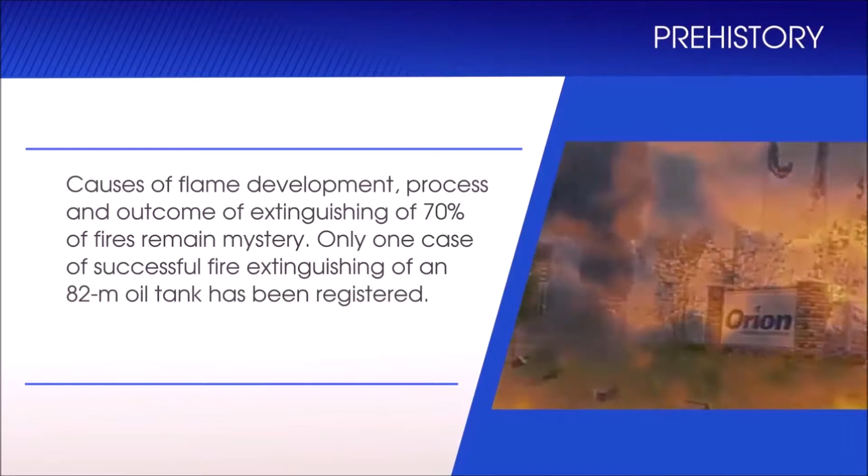The causes of flame development, the process, and the outcome of extinguishing 70% of fires remain a mystery.

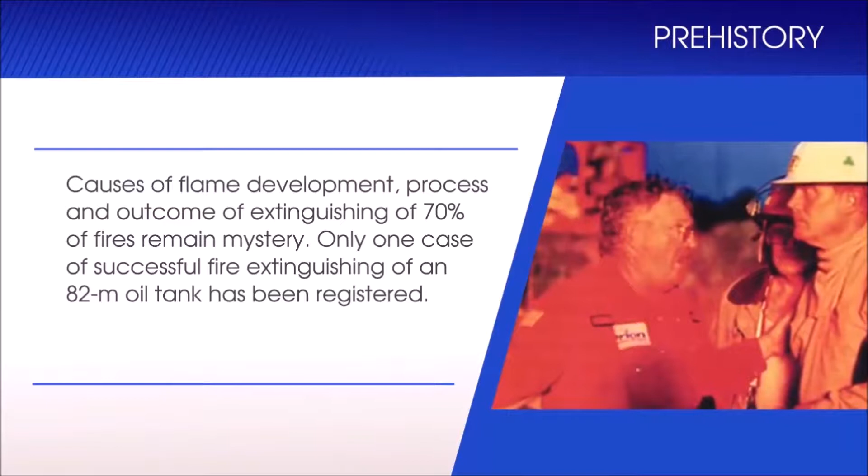Only one case of successful fire extinguishing of an 82-meter oil tank has been registered. The tank was extinguished in the United States at the Orion Oil Storage Facility using non-standard, extra-powerful equipment that had been delivered from another region specially for this purpose.

Not a single case of an oil tank fire extinguished successfully with the help of fixed or semi-fixed firefighting equipment has been registered anywhere in the world so far.

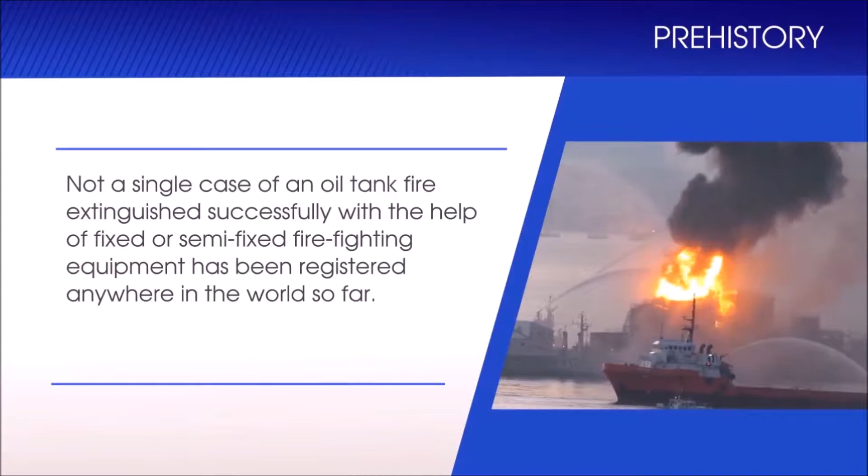These incidents show that in any country in the world, regardless of economic strength, fixed fire extinguishing systems installed on storage tanks in hydrocarbon processing facilities and factories cannot provide the solutions they were built for: first response to a fire and extinguishing it in its initial stages.

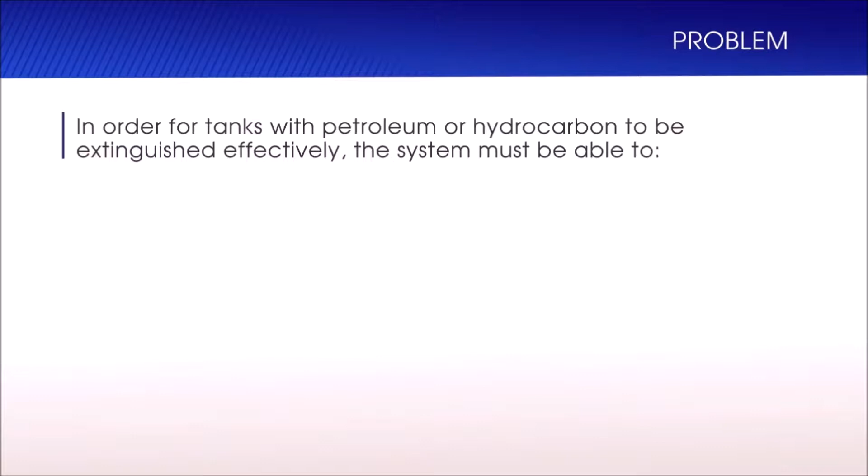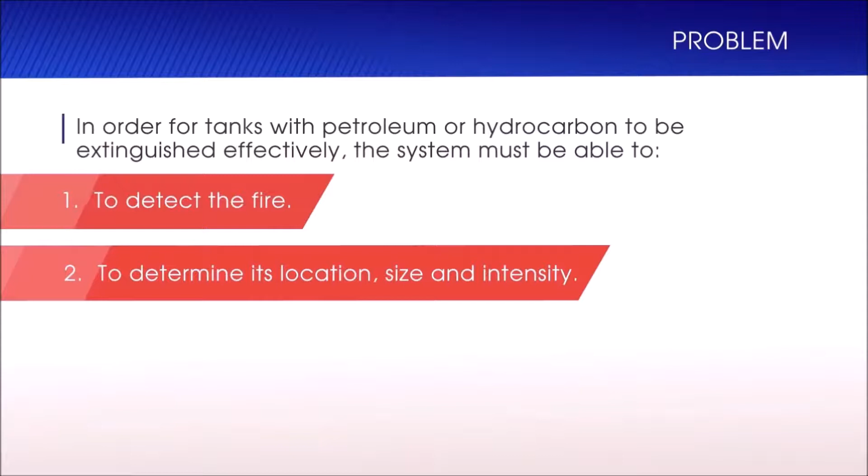In order for tanks with petroleum or hydrocarbons to be extinguished effectively, the system must: 1. Detect the fire. 2. Determine its location, size, and intensity. 3. Turn itself on and deliver the foam directly to the source of the fire.

4. Completely extinguish the fire. 5. Determine and confirm that the burning has stopped. 6. Disconnect extinguishing systems that are not in use.

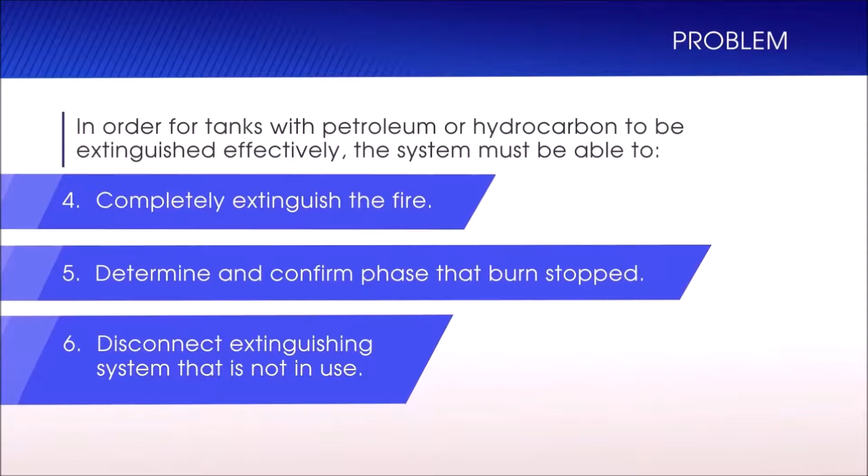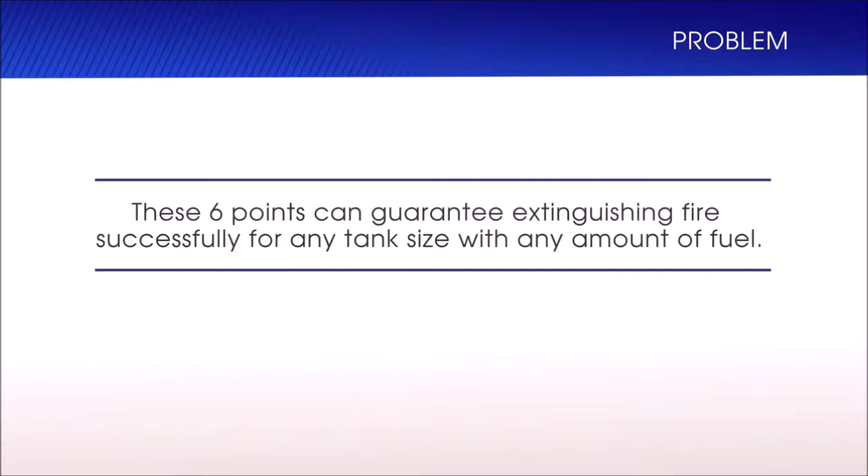These 6 points are guaranteed to successfully extinguish any fire for any tank size with any amount of fuel. The main challenge is the time from the moment of ignition until step 6, which must not exceed 3 minutes.

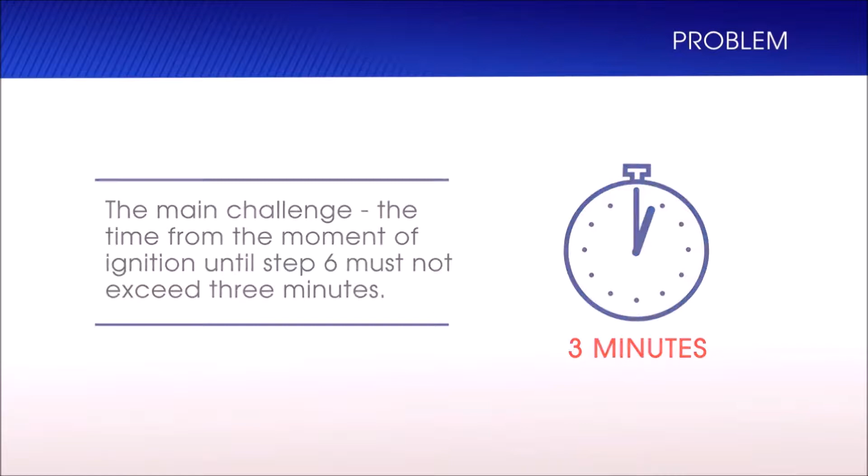Currently, available systems cannot reach the 4th stage in less than 12 hours. We present the Impulse Storm IS fixed firefighting system, which can reach all 6 stages and completely extinguish any fire in less than 60 seconds.

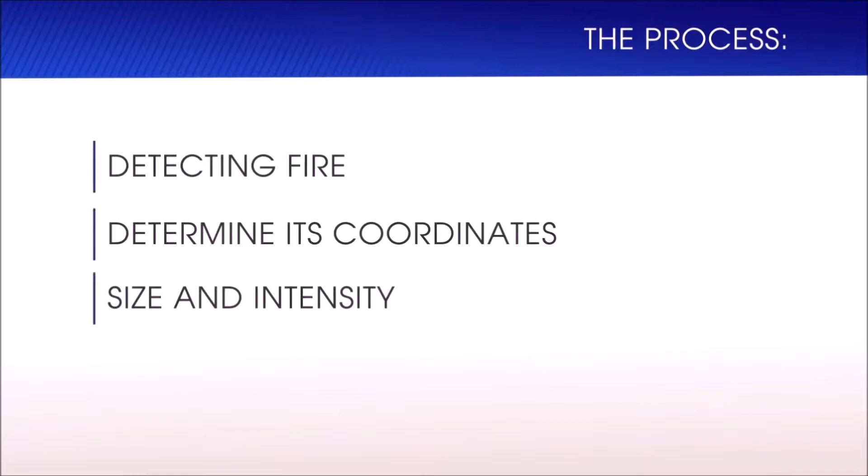The process: detecting the fire, determining its coordinates, size, and intensity. Example: a cluster of oil tanks of varying sizes. Monitoring the facility from a single point is impossible.

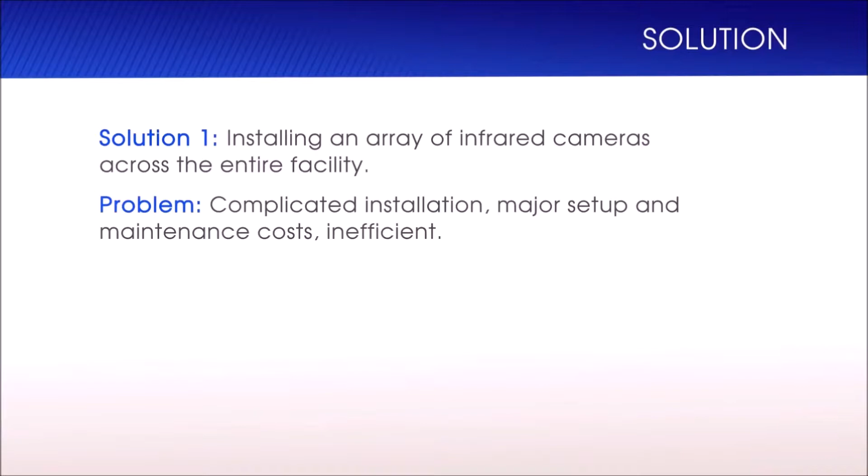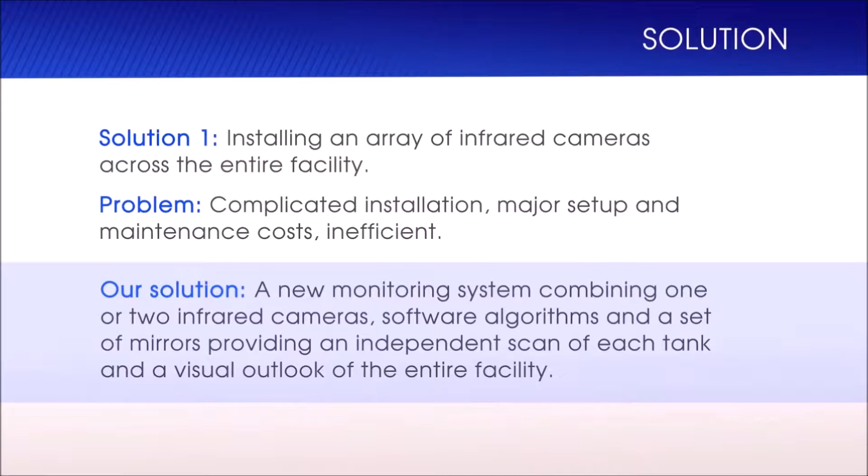Solution 1: Installing an array of infrared cameras across the entire facility. Problems: complicated installation, major setup and maintenance costs, inefficient. Our solution: a new monitoring system combining 1 or 2 infrared cameras, software algorithms, and a set of mirrors,

providing an independent scan of each tank and a visual outlook of the entire facility.

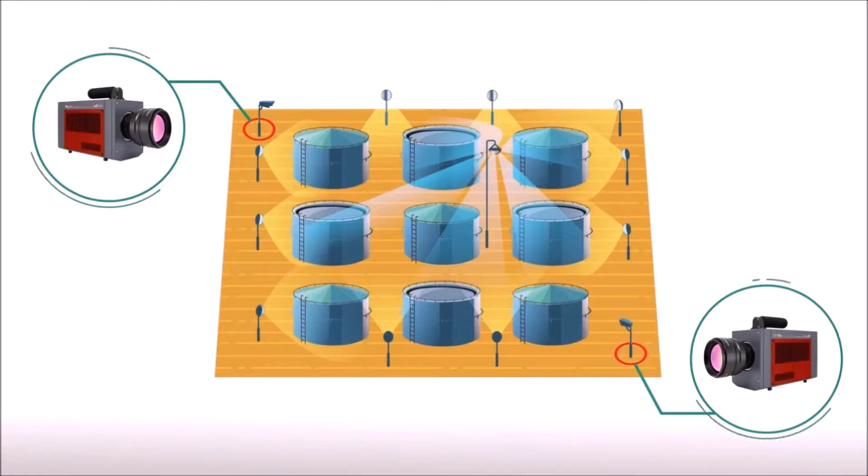Our software analyzes information in real time and can determine the location, size, and intensity of the fire in less than 2 seconds from the moment of ignition.

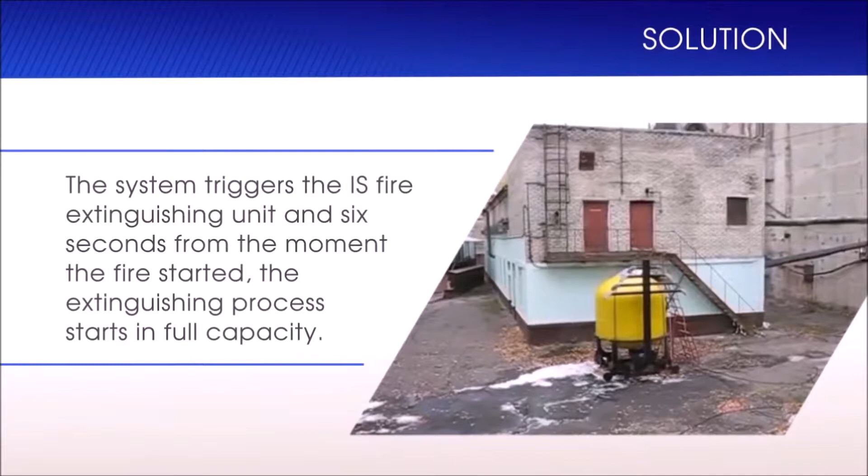The system triggers the IS fire extinguishing unit, and 6 seconds from the moment the fire started, the extinguishing process starts in full capacity.

IS creates super-compressed foam bubbles using very high pressure and neutral gas. The foam expands from the moment it leaves the IS container, goes through pipes at a very high speed, and reaches the top of the tank, where it maintains its speed as it comes out through the nozzle, covering the burning surface.

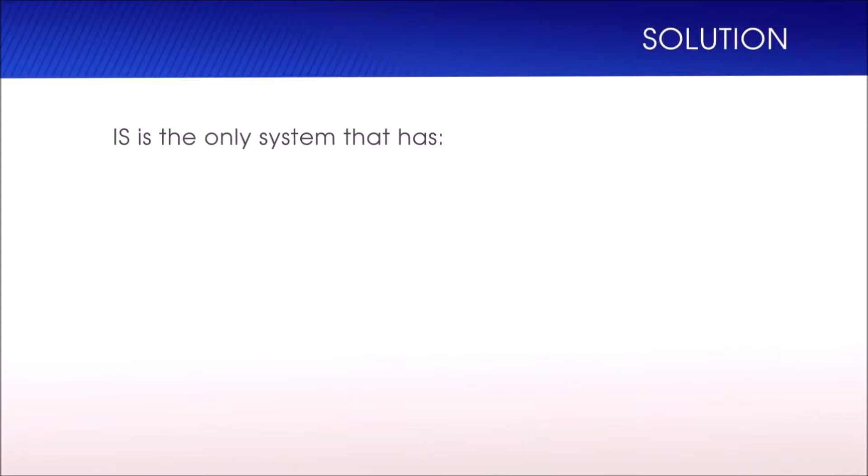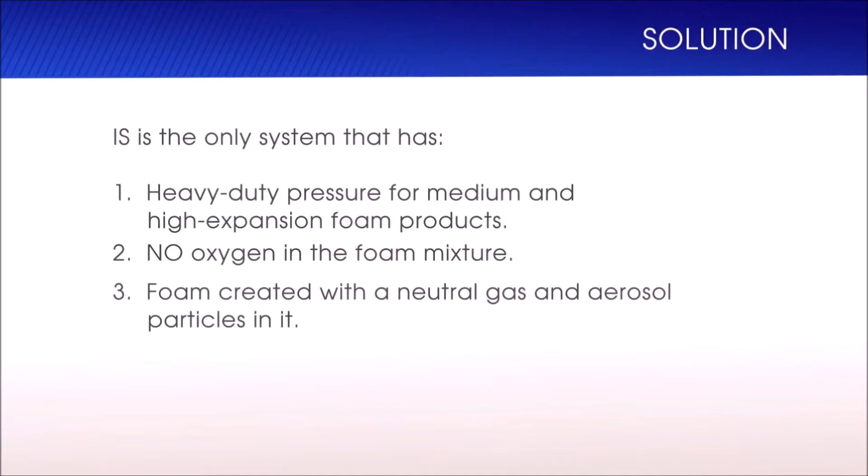IS is the only system that has: 1. Heavy-duty pressure for medium and high expansion foam products. 2. No oxygen in the foam mixture. 3. Foam created with a neutral gas and containing aerosol particles.

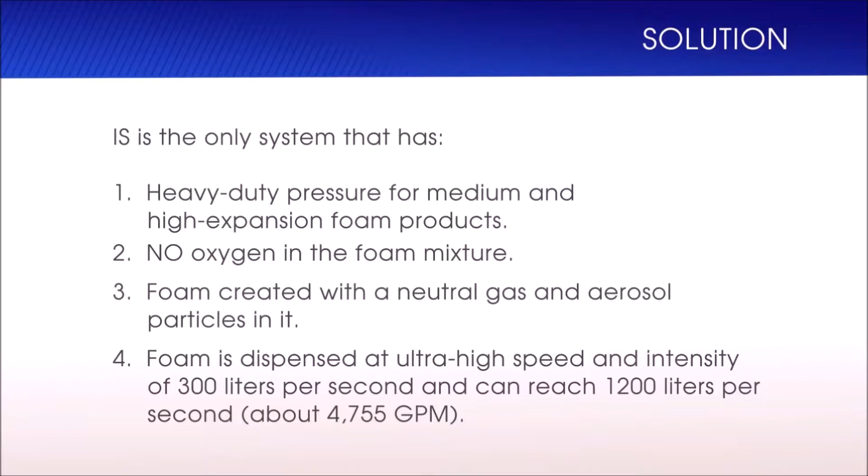4. Foam dispensed at ultra-high speed and intensity of 300 liters per second, reaching up to 1,200 liters per second, about 4,755 gallons per minute.

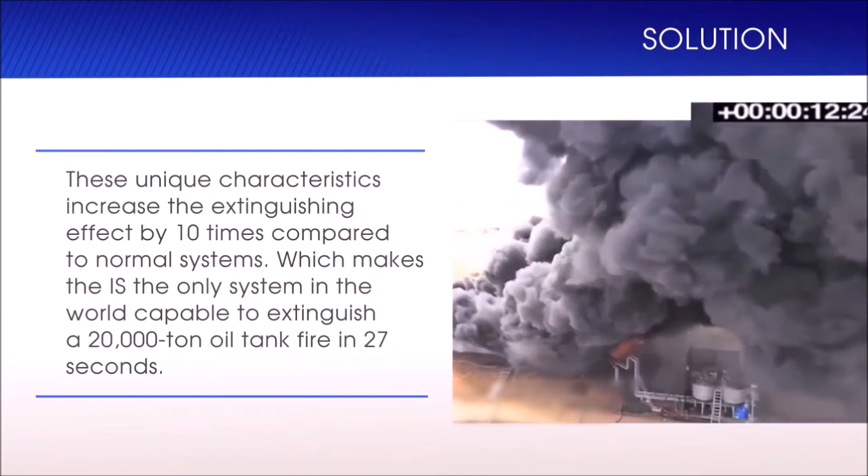These unique characteristics increase the extinguishing effect by 10 times compared to normal systems. This makes the IS the only system in the world capable of extinguishing a 20,000-ton oil tank fire in 27 seconds.

Comparing IS with any other system in the market is impossible, because there is no other system that can extinguish a 20,000-ton tank fire by itself.

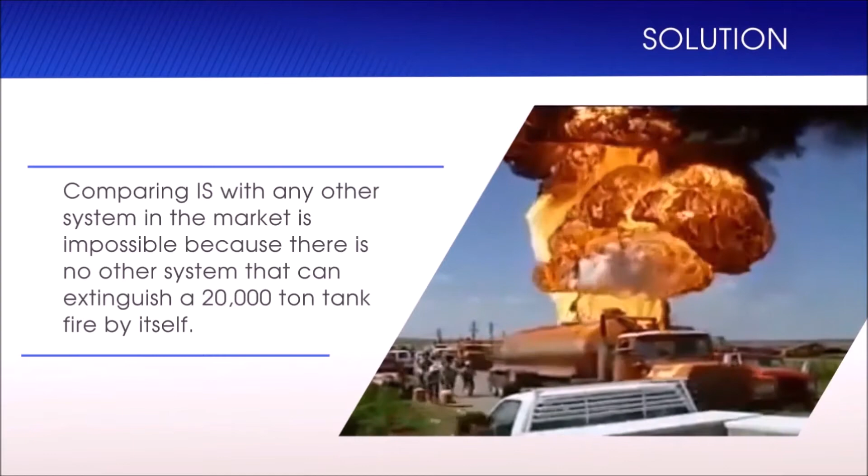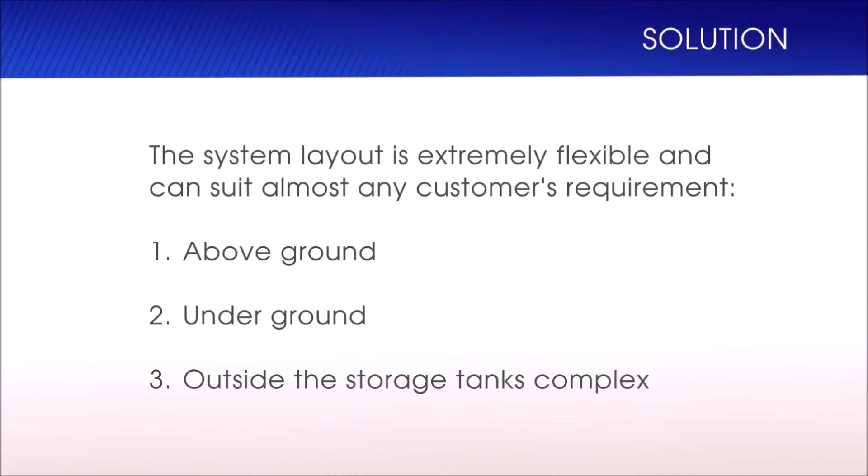The system layout is extremely flexible and can suit almost any customer's requirements: 1. Above ground. 2. Underground. 3. Outside the storage tank complex.

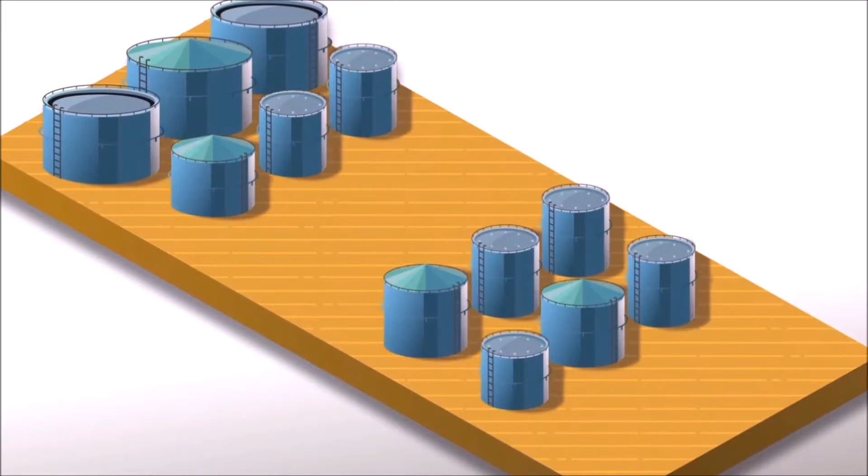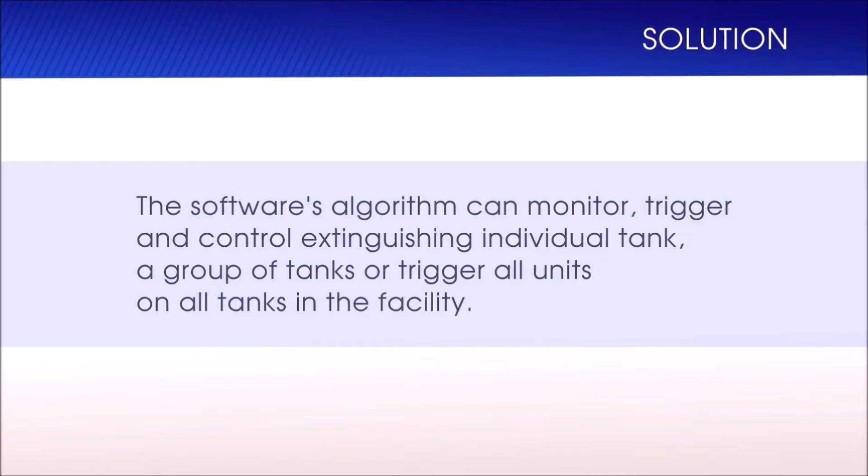The software's algorithm can monitor, trigger, and control the extinguishing of an individual tank, a group of tanks, or trigger all units on all tanks in the facility.

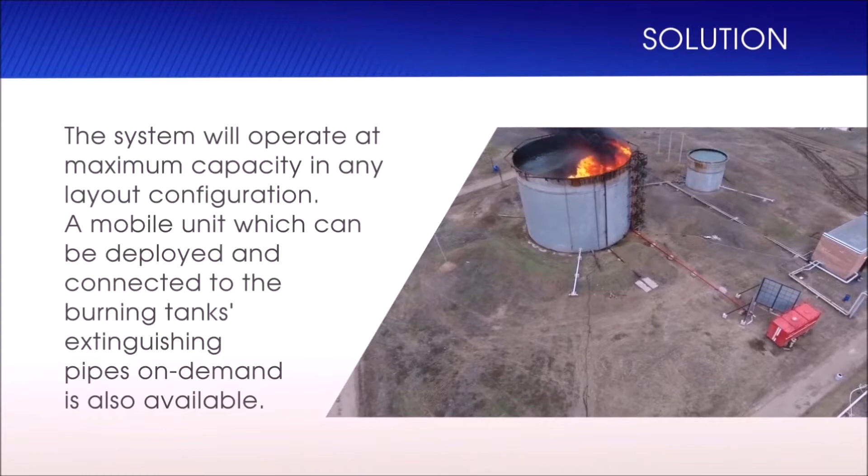The system will operate at maximum capacity in any layout configuration. A mobile unit, which can be deployed and connected to the burning tank's extinguishing pipes, is also available on demand.